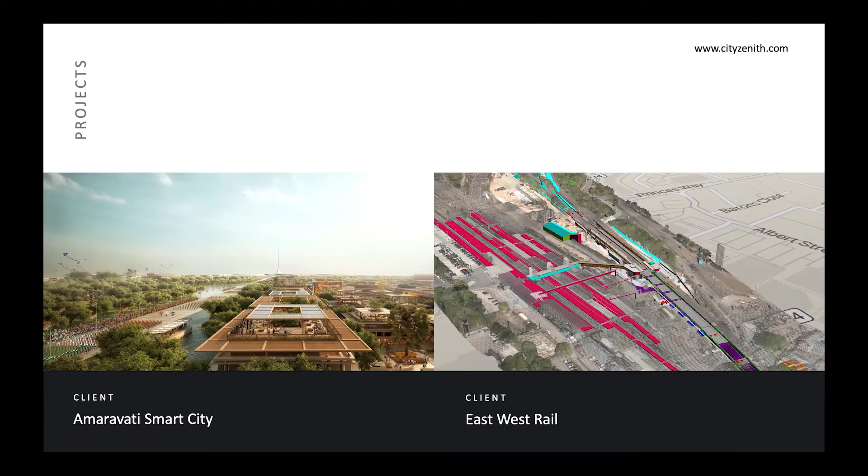They include major real estate companies like the Orlando Sports and Entertainment District, et cetera. These are all the types of entities now who are getting in on the act. The kinds of things we've worked on over time range from master developments, seaports, smart buildings, smart cities, smart grid projects, campuses, airports, infrastructure projects, and now more and more commercial real estate.

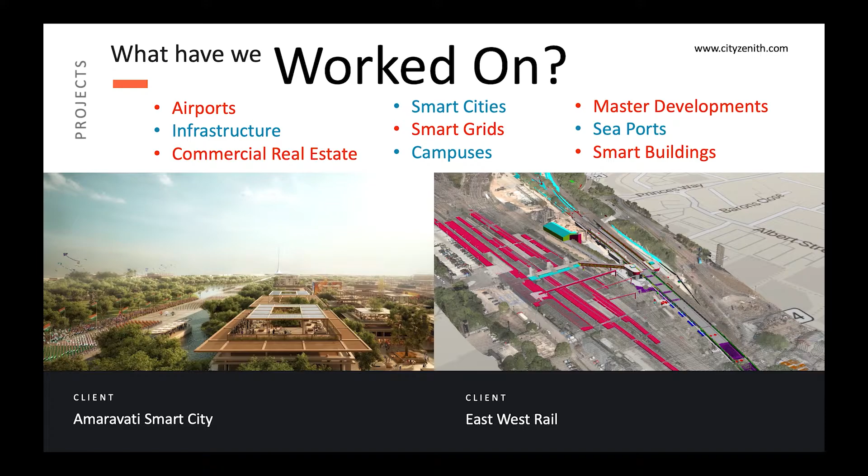I'm going to walk you through a couple of these to give you a sense of what some of these look like in action and to describe a bit about the use case.

One of our earlier projects using a digital twin at scale was the city of Amaravati in South India. It was the first city in South India, the first actual capital city in that country built in 70 years. They commissioned the prestigious London-based architect Norman Foster to do the assignment. The architects were using all kinds of tools, and there were myriads of what we call project architects and design architects from different firms, all working on the city.

To keep a cohesive vision for the project, the chief minister mandated the use of a digital twin to allow these different architects to integrate all of their 3D models and data into a common framework that would let them simulate the impact of these designs on things like the average street temperature in the middle of summer, and wind patterns, et cetera.

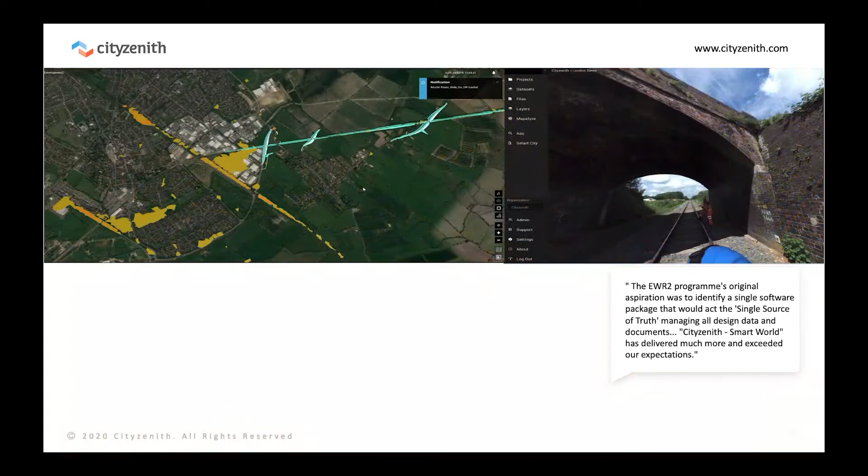We were able to integrate myriads of BIM models, Bentley, CATIA models, Revit models, design, things like GLTF models, and their associated data, and apply an artificial intelligence-based microclimate simulation tool to prove that we could reduce the average street temperature in the middle of summer by as much as 8 degrees. Those of you in the engineering business know what a massive savings that is, not just dollar-wise, but also in terms of carbon efficiency.

Later on, we deployed this technology in the United Kingdom on a massive infrastructure project called the East-West Rail Project, running from Oxford to Cambridge. It's a 103-kilometer project that W.S. Atkins, Laing O'Rourke, Network Rail, and some other major players were involved in creating together.

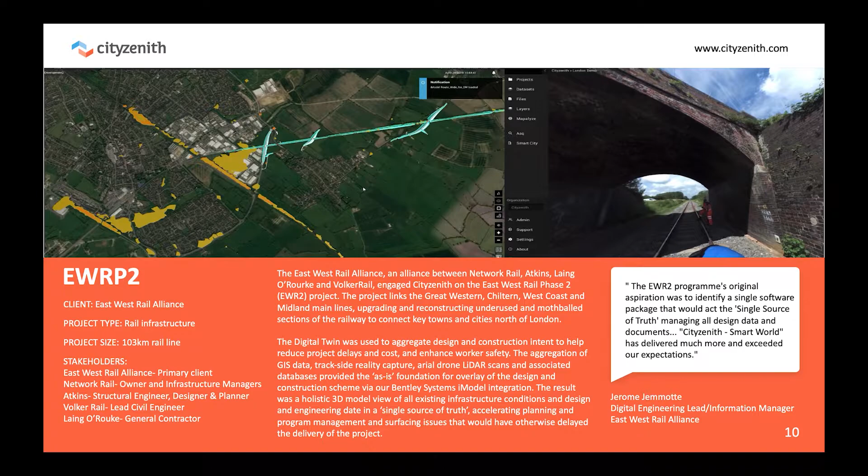Because it's such a big project that would ultimately take 25 years to build, they wanted a single project data map for the entire thing that would allow us to integrate things like LiDAR scans of the entire site taken from drones flying overhead, with satellite imagery, with 3D JPEGs, and then eventually allow the engineers to integrate their real-time BIM models such that they would respond to these constantly changing, constantly improving, always updated on-the-ground conditions. It was a fabulous experiment and one project we're particularly proud of.

Other things we're getting involved with include straightforward real estate and commercial real estate. This is the Orlando Sports and Entertainment District, just to the west of I-4 in Orlando. Everyone knows Orlando for the theme parks, but now they're developing this wonderful, almost LA Live type project.

If you're familiar with the project around the Staples Center in the United States, it's a mixed-use, multi-function, entertainment-based development connected right to a major sports arena where the Orlando Magic play basketball. It's designed to integrate the sports arena with everything else happening in the city and to make the experience of going to the arena much more of a full day or full weekend experience.

In this case, they're using a digital twin for a variety of purposes. One is strictly tenant-facing. As a tenant or visitor, they want to be able to pull information from the twin into a mobile app that would let visitors do everything from wayfinding around the facility, finding parking, valeting a car, choosing a seat in an arena, to choosing a hotel room and seeing what the view is like, all from a single application.

So it's really a kind of 3D virtual tour loaded with data kind of experience, designed to make all of this much more holistic for the visitor. It's also going to be used to integrate multiple smart building systems, including energy management, tenant security, et cetera, into a single portal. We've already begun to do that in the model, and in the process you can derive efficiencies between those systems, find lags, eliminate redundancies, which really draws attention to the power of tools like this.

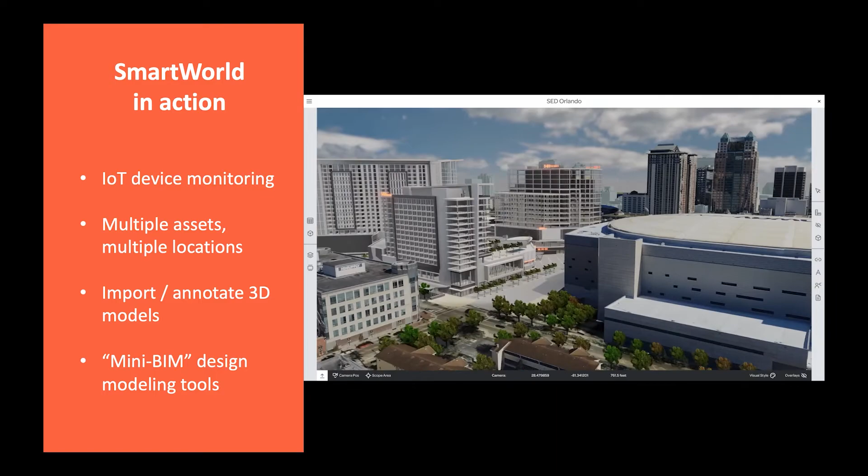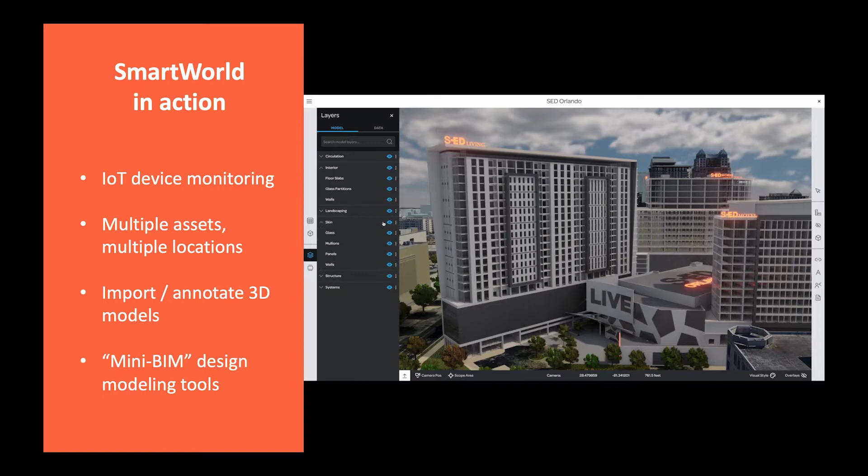So I'll do a little bit of narrating here. This is the latest release of Smart World that you're seeing. This is called Smart World OS, and this is the work that we've been doing in Orlando with the Sports and Entertainment District. And here we've integrated a number of smart building systems already, including those that monitor heat pumps, air quality, and also even public safety footage, et cetera, all into a common framework.

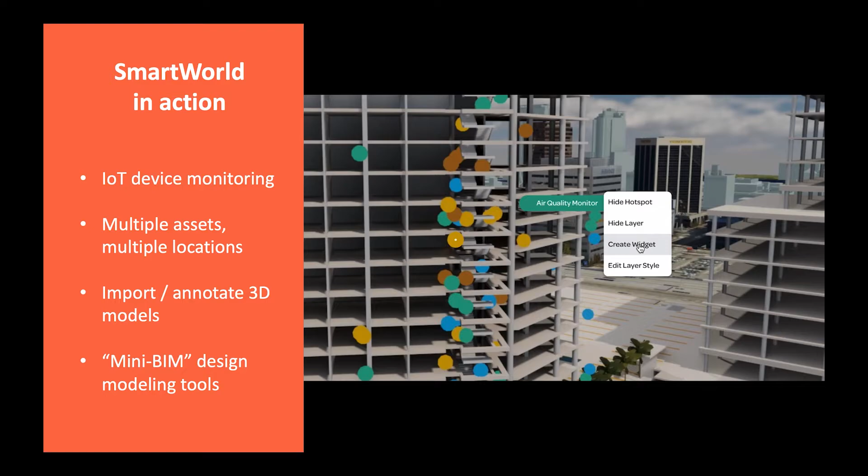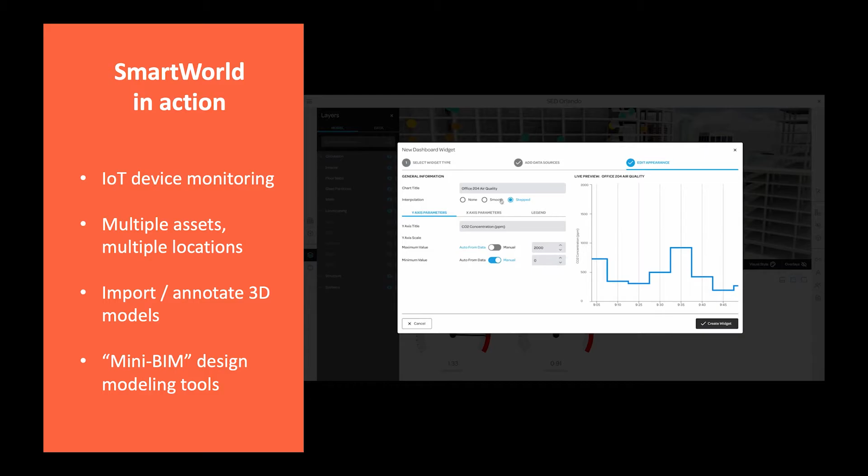And then we analyze those. We can see their performance in real time, and then the engineers can analyze those and optimize those using a variety of tools embedded on the back end, which are part of the overall mission of making the project more efficient. This process continues on an ongoing basis, and we have a single tool from which all of the operators from all the different facilities can commonly work from.

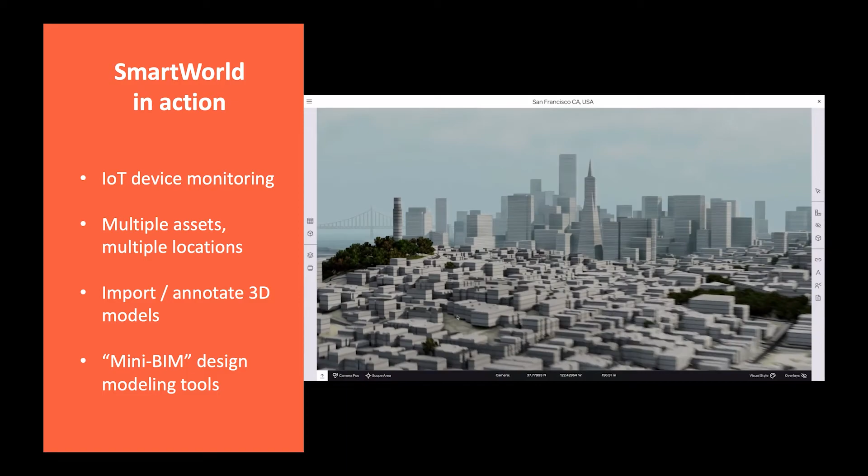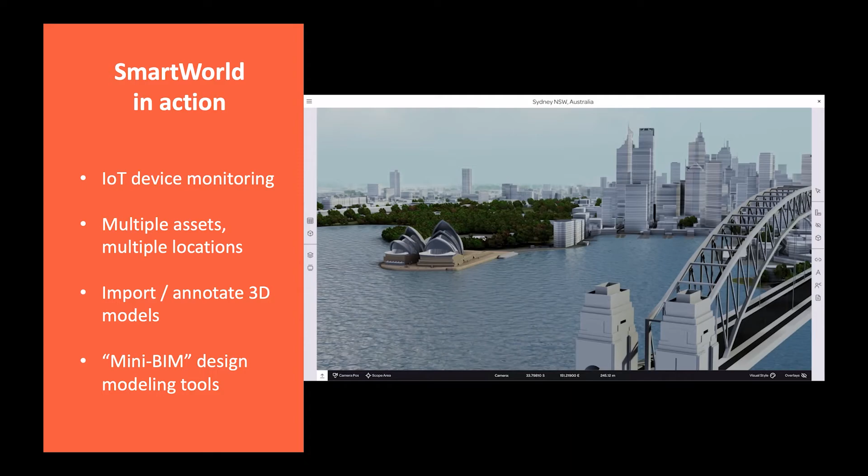Examples here of how the tool gets used when we have multiple assets in multiple locations. Here we're logging into Sydney, where we have an owner that has multiple locations. This one is on the eastern coast of Sydney. And that same owner may have assets in other parts of the world too.

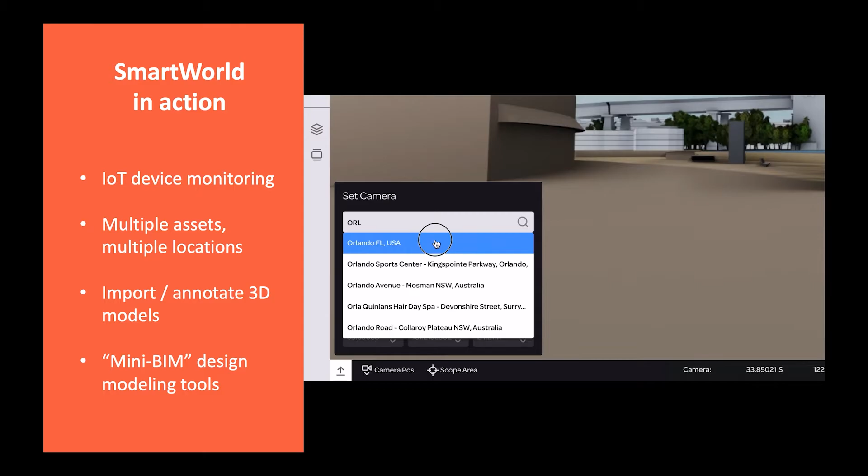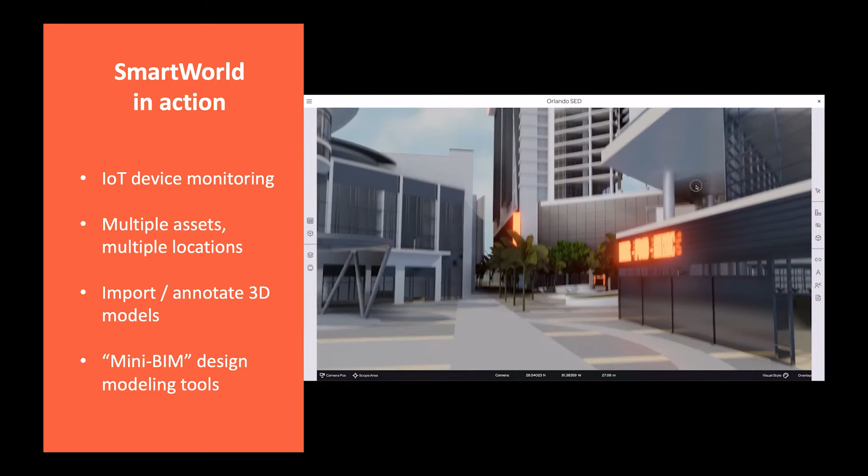So we're just going to kind of hyperspace to Orlando. And this is Orlando. We can go and then inspect our Orlando properties. We see the location of the SED. We can then drill down more granularly into the BIM model itself, where we have all the asset data and all the IoT sensors and all the analytics embedded in that real-time model.

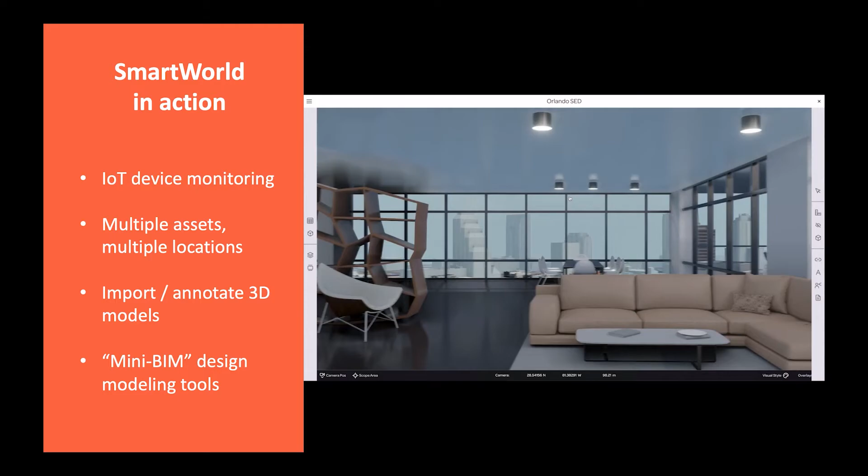We can inspect, we can generate reports, and we can now even go inside this facility to see information inside the building, which is really kind of extraordinary. So electrical panels, boiler rooms, et cetera, major equipment we can inspect.

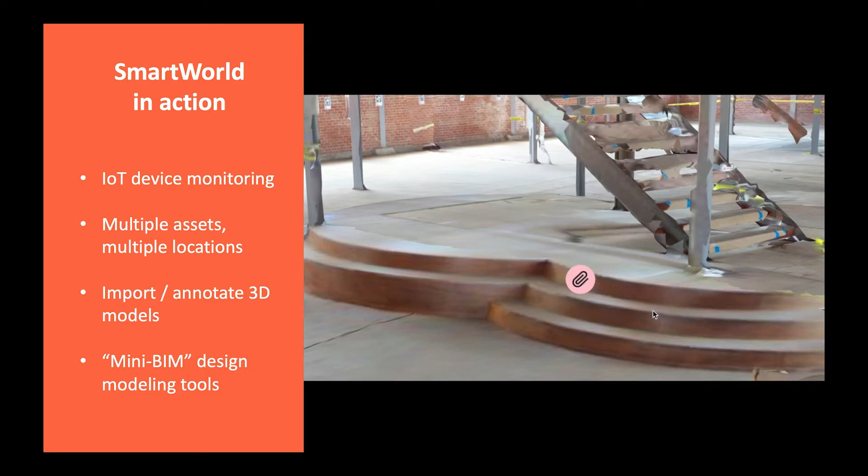And now we've also integrated things like Matterport models. Our work with the US military has brought this into our platform. So here, not only can we integrate these models, we can also annotate them with real data, so that when we're running analysis, we're actually running analysis on all the data inside the Matterport models themselves.

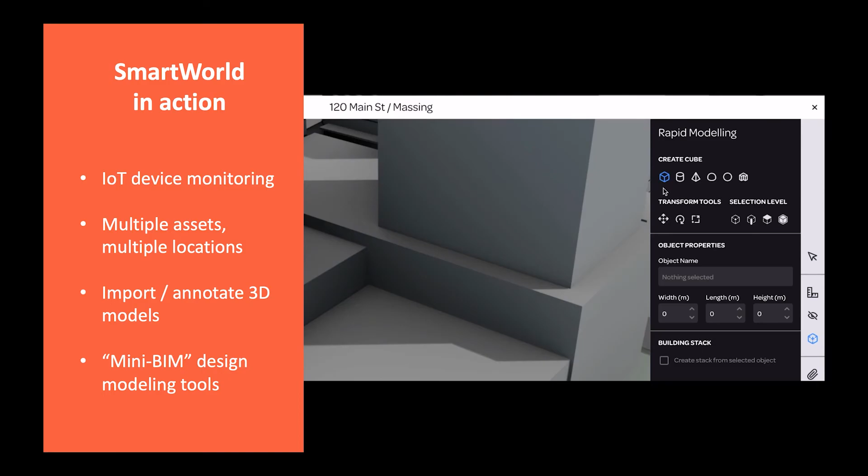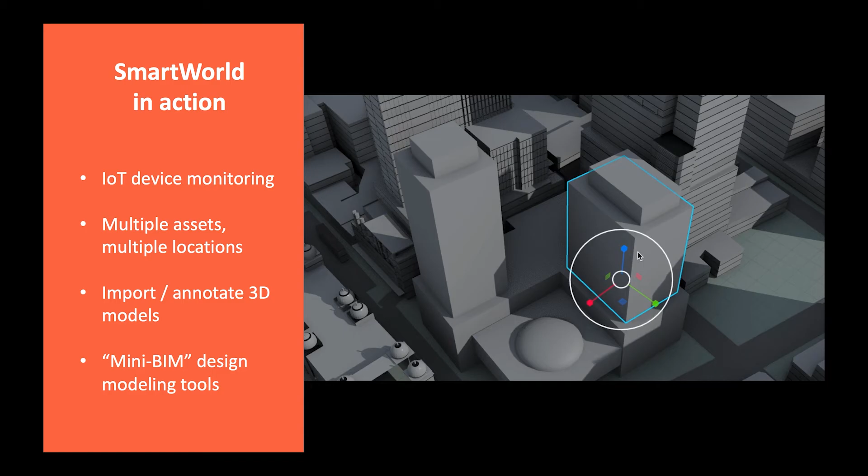As I mentioned earlier, we're finally getting into the space where we can begin to develop our own models. These are our kind of mini BIM rapid design modeling tools. Not everything you need a BIM model for. Most things you need kind of a simple design model for, especially at the planning phase, which is what this achieves. But it's based on the rules of geometry and physics and can be used and served up into the various analytics applications that we have integrated.